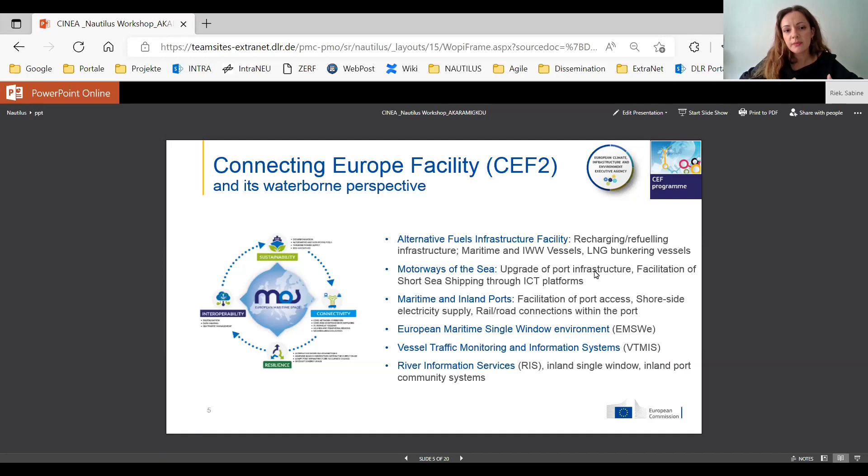With this in mind, CEF2 funded and will fund projects, among others, in the areas of alternative fuel infrastructure facility, vessel traffic monitoring and information systems, river information services, inland single window, and inland port community systems. Next slide, please.

The Innovation Fund is a key contributor for delivering the European Green Deal. It is a major tool to support industry and the energy and transport sectors in reaching the decarbonization objectives, with a budget of 25 billion euros to be spent until 2030.

The main target is to support the industry through the valley of death, pursuing ideas from their fundamental research to the early stage of demonstration. This is done through calls for large and small scale projects, focusing, for example, on the next generation of technologies, innovative low carbon technologies, energy storage, and more.

Several waterborne related applications were submitted in the course of 2020 for large and small scale demonstrators concerning first of its kind liquid CO2 transport vessels, tankers based on electrical engines and battery packages, e-methanol, hydrogen and fuel cell powered ships, and wind sails. An example of large-scale demonstration projects under the program funding is the project Hydrogen Europax, which is a zero-emission vessel powered by a large-scale fuel cell system, and will exclusively use green hydrogen from renewable resources.

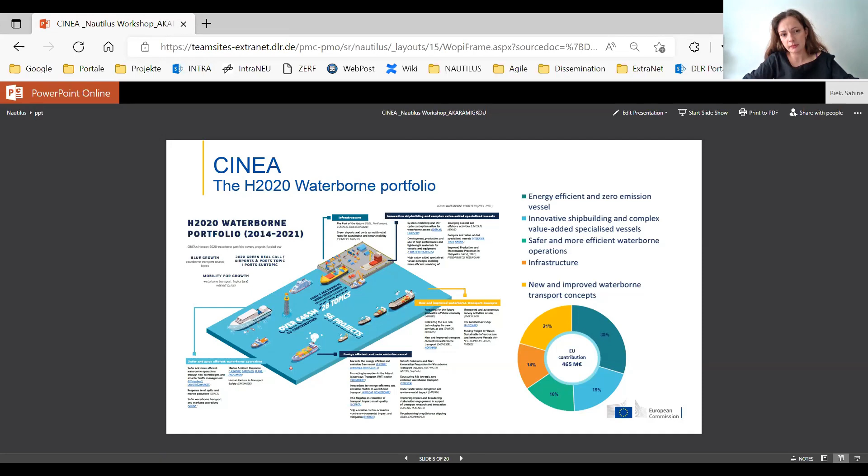So here, for zero-emission waterborne transport, the Horizon calls were asking the projects to develop innovative solutions to decarbonize shipping in general, to improve the competitiveness of European maritime industries and shipping companies in relation with green shipping, to create a widespread awareness and buy-in for stakeholders towards zero-emission shipping, to better understand the impact of the vessels through monitoring, detection, and modeling of emissions, and of course to provide technical evidence to assess the gaps in the current regulation of vessels and air quality.

Next slide, please. There are 18 projects addressing energy efficiency and the development of zero-emission vessels, with a budget that represents 30% of the overall budget allocated to waterborne calls, which is 465 million euros.

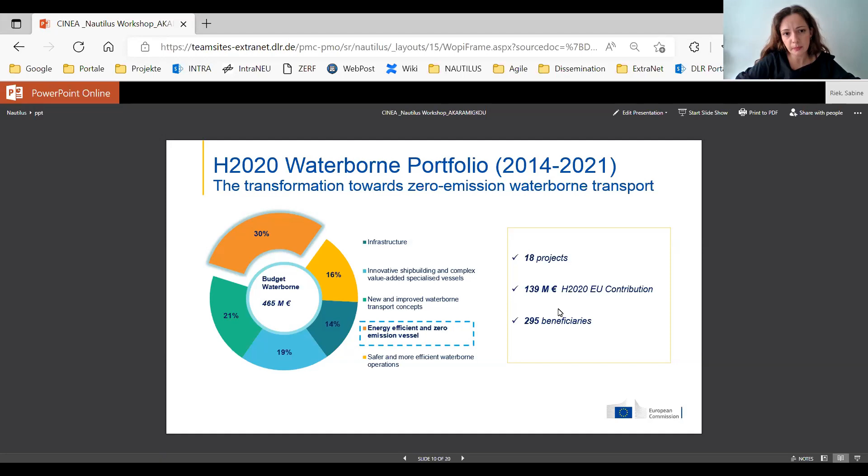Next slide, please. Now, with regards to safe and secure waterborne transport, the Horizon calls were asking the projects to radically redesign the evacuation process and systems for passenger ships, to enhance the prevention and management of fires at sea without recourse to external intervention.

To improve the observation and predictions of oil spreading in the sea using novel online sensors on board vessels, fixed structures or gliders, to build the enabling knowledge, technologies and operational procedures and test them in a real-world environment, and to improve transport safety through a more timely, focused and integrated adoption of human factors in order to minimize human error.

And finally, these solutions that address these risks should and could be reflected within the forthcoming revisions of relevant IMO rules. Next slide, please. There are 9 projects addressing safe and secure waterborne transport with a budget that represents 16% of the overall budget allocated to waterborne, with consortia of more than 200 beneficiaries.

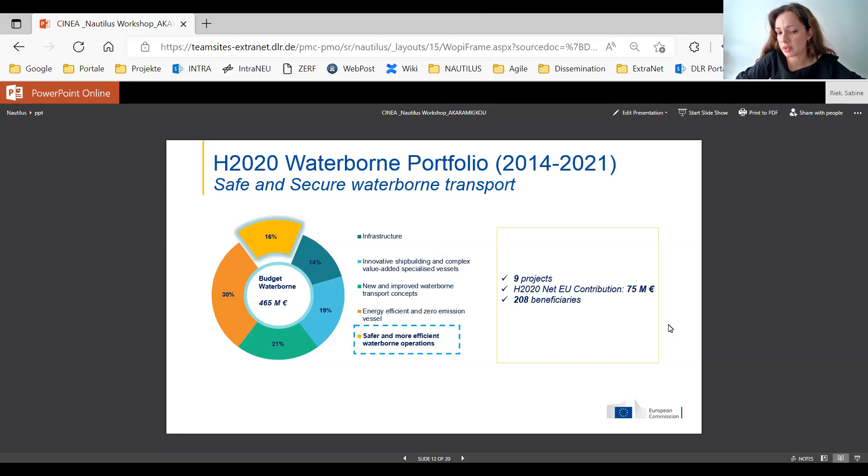Next slide, please. And I have divided the projects that are clustered within the competitive, connected, and automated waterborne transport under 3 more specific categories, which are infrastructures, new and improved waterborne transport concepts, and innovative shipbuilding and complex value-added specialized vessels. When it comes to infrastructure, the projects had to address challenges related to the improvement of logistics efficiency and integration of the port in the surrounding socioeconomic area.

The optimization of passenger and freight flows for low emission mobility, the acceleration of deployment of sustainable alternative fuels and electromobility, and the commitment and contribution to a Europe-wide take-up of technological, non-technological, and social innovative solutions. Next slide, please.

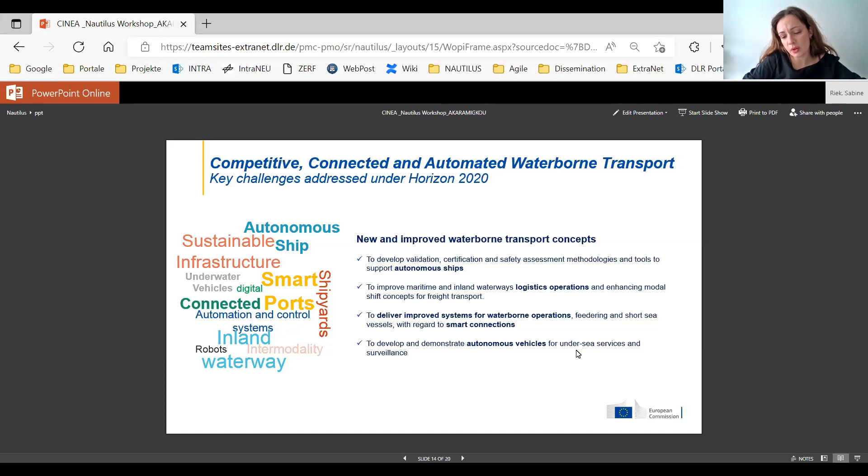For new and improved waterborne transport concepts, the project focused on developing validation, certification, and safety assessment methodologies and tools to support autonomous ships, improving maritime and inland waterways logistics operations, and enhancing modal shift for freight transport, delivering improved systems for waterborne operations, feedering and short sea vessels with regard to smart connection, and developing and demonstrating autonomous vehicles for undersea services and surveillance.

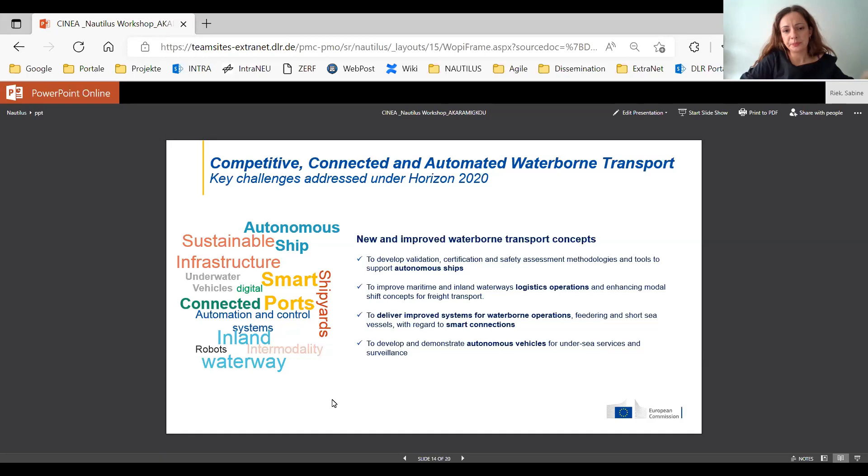And this cluster closes with innovative shipbuilding and complex value-added specialized vessels. Within this category, the projects aimed at providing a comprehensive performance analysis and simulation for new advanced materials and entire constructions of the vessels, developing and validating advanced modular standardized shipbuilding concepts for European waters, increasing the professional skills of workers and the capability of the European shipbuilding industry to develop and commercialize specialized vessels, and exploring and validating low impact cruise and passenger ship designs and operations.

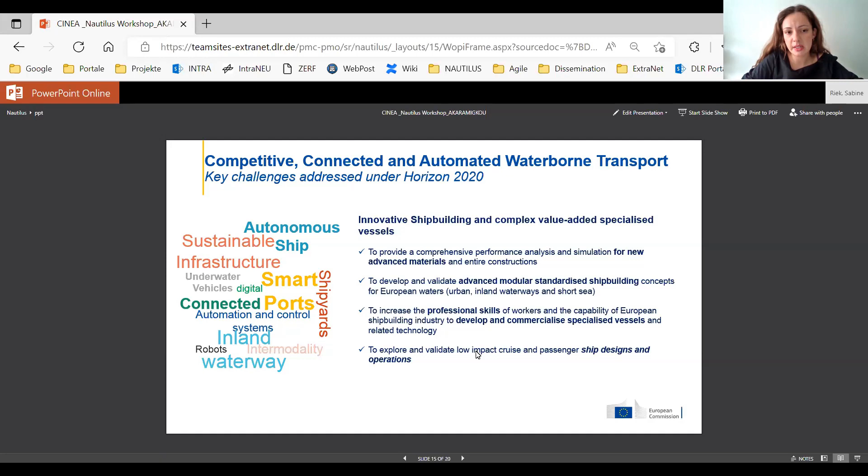So there are 29 projects funded to address competitive, connected and automated waterborne transport. 14% of the budget goes to infrastructure, 19% to innovative shipbuilding, and 21% to new and improved waterborne transport concepts. A budget of more than 250 million euros was allocated to these projects, with consortia of more than 400 beneficiaries.

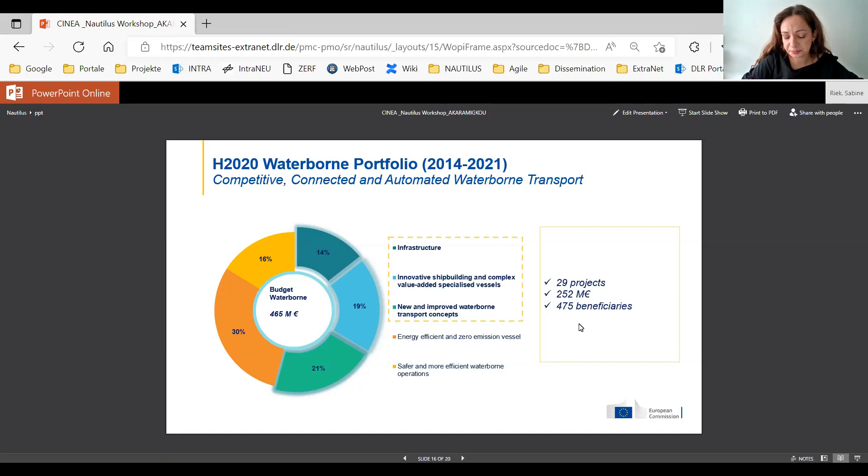Of course, the results of the Horizon 2020 program was and will be the bottom line for the research opportunities in Horizon Europe. Cluster 5 of the program, which CINEA is managing, aims to fight climate change by better understanding its causes, evolution, risks, impacts, opportunities, and by making the energy and transport sectors more sustainable.

As of today, we have already finalized the evaluation of 4 first calls for 16 Horizon Europe waterborne related projects. The European Commission services and the partnership are working hard at the moment to deliver the next work program 2023-2024, with the first deadline in April 2023.

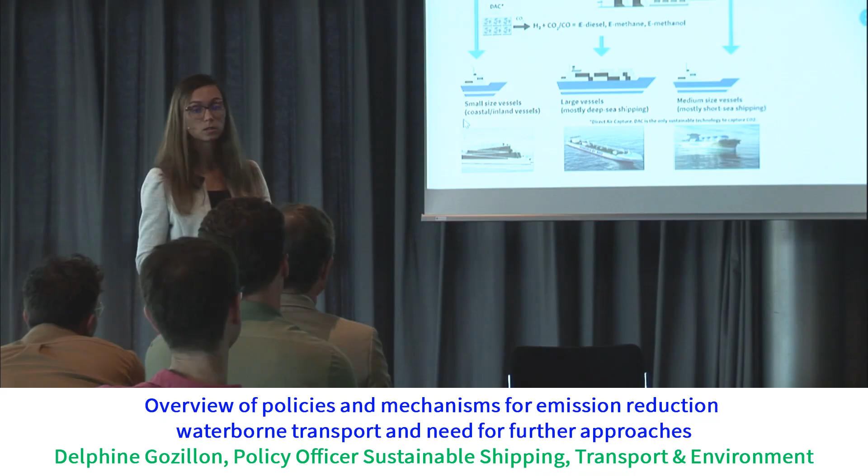In Lucerne, I'm happy to be with you and to exchange with members of the Nautilus project. Today I was asked to speak about the legislative framework that we have, and we'll be focusing a bit on the European Union, because the EU has a lot in the pipeline for the maritime sector. So I'll just start.

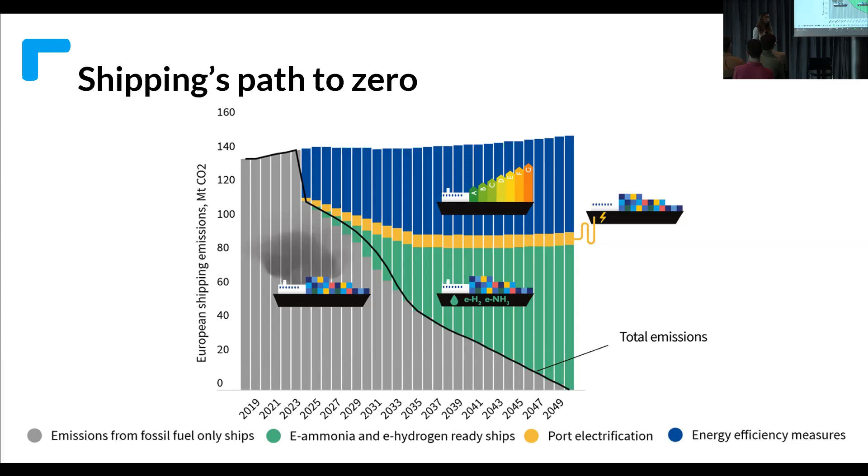I just wanted to begin with the scenario that we developed in our decarbonization study for shipping. We analyzed the different technological pathways to see how shipping can decarbonize fully by 2050. The main results show that energy efficiency has a big role to play; we could cut up to one third of emissions.

So I was saying that energy efficiency is important, it can cut up to one third of emissions. Electrification in ports is also important, it's more on the order of 6% of emissions that we could cut.

But really the bulk of emission reductions comes from changing the fuel, of course. Here we recommend fully sustainable fuels that can achieve zero emissions, and these are what we call green e-fuels.

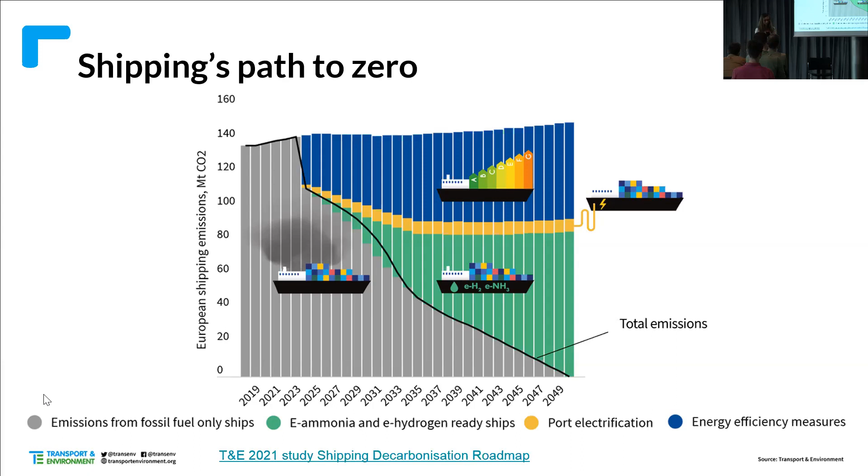We have different solutions, different sustainable fuels, depending on the shipping segment, because maritime transport is quite specific in that regard - it's not like aviation where you can blend e-kerosene in any plane. For ships, it really depends on the ship size, but also the segment.

So here are some examples of sustainable fuels. There could be direct electricity for smaller ships, especially on lakes, for example in Lake Lucerne. Or for larger vessels, the direct use of hydrogen, either in combustion engines or in fuel cells, is possible.

But for longer distances, and this is more for big container ships, we would see derivatives of green hydrogen - for example green ammonia, green methanol, but also synthetic diesel or synthetic methane are possibilities.

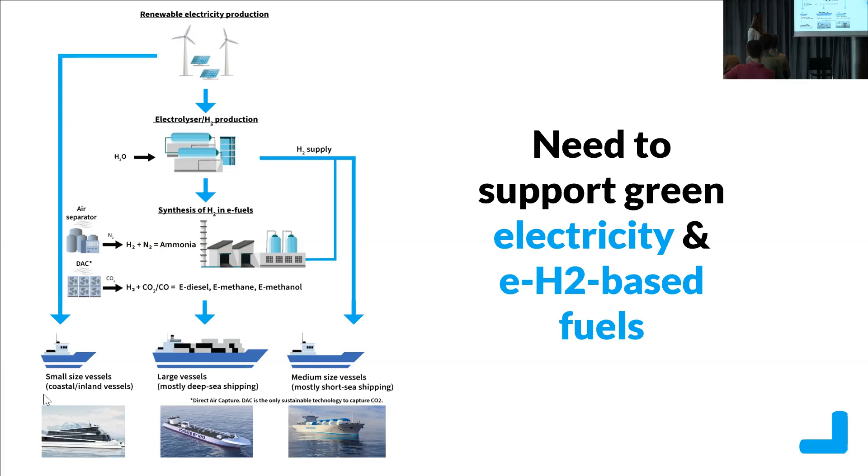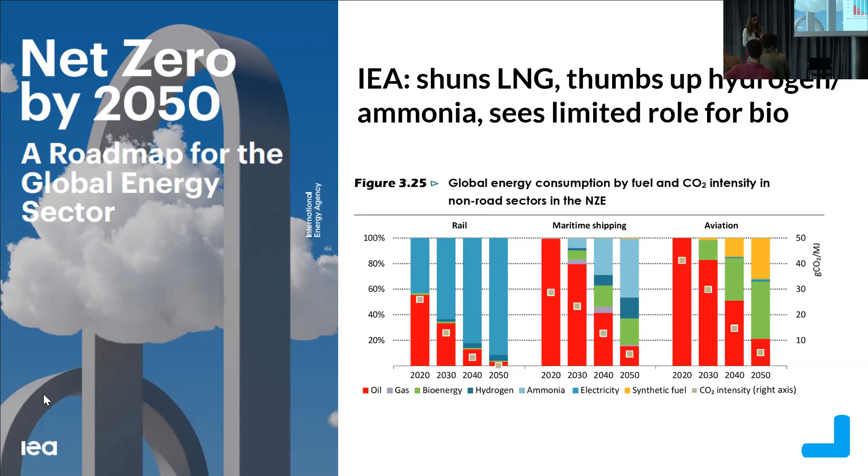There are a lot of concerns today on the use of LNG as a marine fuel. Notably, the World Bank issued a report last year warning policymakers against the use of this fuel because of the risks of stranded assets. This is something investors have in mind when investing in projects.

There are also other alternatives that are zero emission and which are funded by the European Union, as presented by the previous speaker.

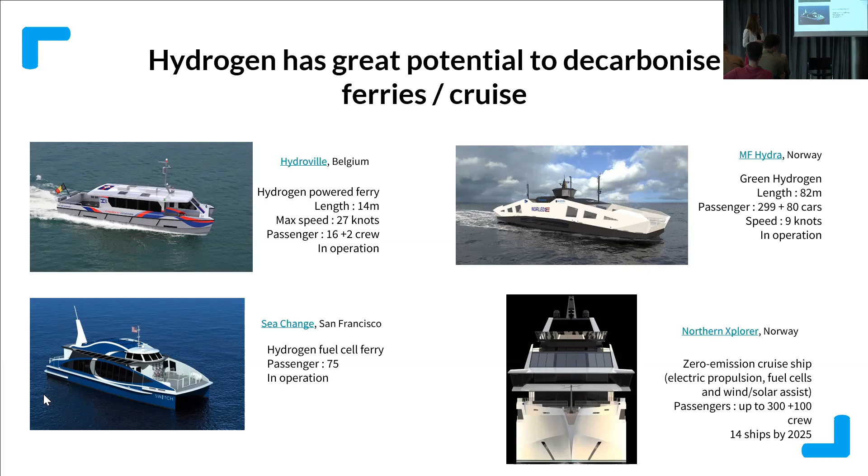I think one very interesting example here is the Northern Xplorer in Norway. Of course this is a much smaller ship than a typical cruise ship, but it could run on hybrid electric propulsion and hydrogen fuel cells. This is already being ordered - we would have 14 ships by 2025.

Now comes the regulation. The European Green Deal translated into a legislative agenda, a package of proposals put on the table by the European Commission last year. Now we are in the process where the European Parliament and the Council of the European Union are negotiating the details, especially the level of ambition being discussed.

It might sound like a lot for maritime transport to achieve in the coming years, but from the point of view of environmental organizations, the package is actually not enough. This is what I'd like to talk about today.

Here's an overview of the different shipping proposals. One is about the demand side, how to ensure uptake of new fuels - this is FuelEU Maritime. One is about the carbon price, putting a polluter pays principle in this sector. The other is the Renewable Energy Directive, about fuel suppliers and bunkering infrastructure, since we need compatible refueling points in ports. So this is a whole framework.

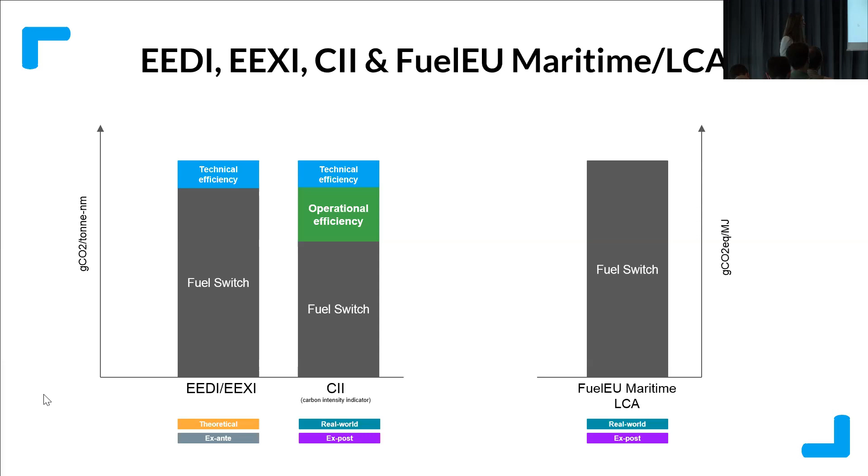This is the full design of the FuelEU Maritime proposal. We did a study on this legislative proposal, taking the life cycle GHG analysis provided by the European Commission, and we compared the GHG footprint of every maritime fuel. This is all based on data provided by the Commission. We didn't invent anything.

What is interesting to see is how the different fuels will progressively cease to comply with the regulation, because the FuelEU Maritime regulation will put a GHG intensity target on every unit of megajoule that is used. So of course it starts very mildly in the first years, but then it becomes more stringent. It's particularly relevant, I think, for the case of LNG.

Because the GHG footprint of LNG very much depends on the type of engine that is used. The difference you can see between the types of engines is typically the methane slip. The four-stroke engines usually used on cruise ships are the worst ones, and the GHG footprint is usually higher than current diesel ships.

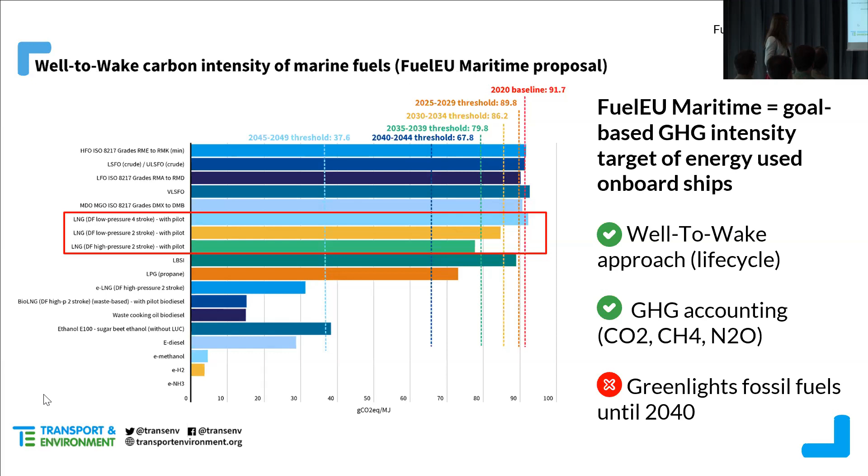What we have criticized in this proposal is that the targets in the first 15 years are so low that it greenlights fossil fuels until 2040. So you can use purely fossil fuels until that date and still comply. In our analysis, based on the cost of the fuels, we forecasted that LNG demand could be driven from 6% today to 23% already in 2030. This is quite significant, and this is why we recommend other approaches to ensure the uptake of sustainable fuels arrives much quicker.

One tool that is quite important is to raise the targets. Currently, the targets proposed by the European Commission do not go to zero emission by 2050. So of course, if we want to respect the Paris Agreement, we need to put these targets in the right context.

This is the main proposal from Transport and Environment: to ensure sufficient uptake of green hydrogen-based fuels. Here we're talking about green hydrogen, green ammonia, green methanol, but it could also be synthetic diesel or synthetic methane. We need to have a mandate on ships to use a minimum percentage already by 2030. This is key to encourage demand and make sure we meet our decarbonization targets by 2050. We recommend 6% by 2030, and this is being discussed in the European Parliament right now, and might be voted in October.

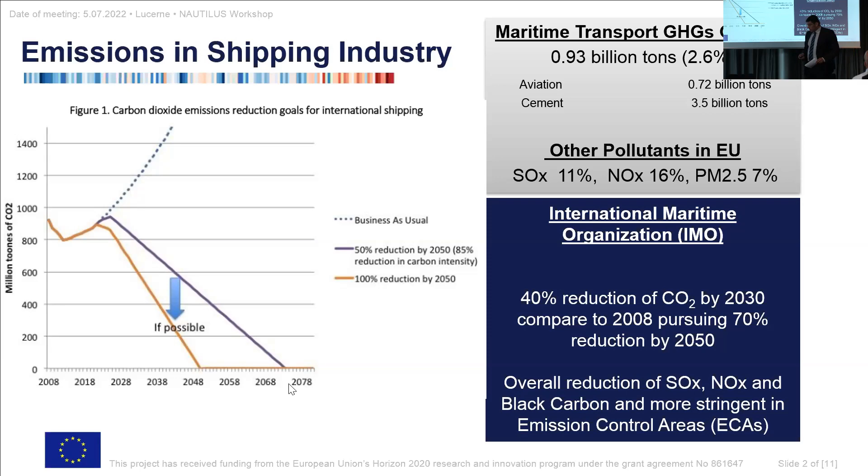Other pollutants are relevant, and we had a long debate about it before we started talking about global warming and CO2 reduction, because CO2 does not harm health directly, while other pollutants do. There is a quite long effect - this is a result from France that has come out, whether it's lungs, blood, vascular system, brain, heart, or reproduction. All of them - SOx, NOx, the PM particles - have direct health adverse effects, and we are still learning more about them.

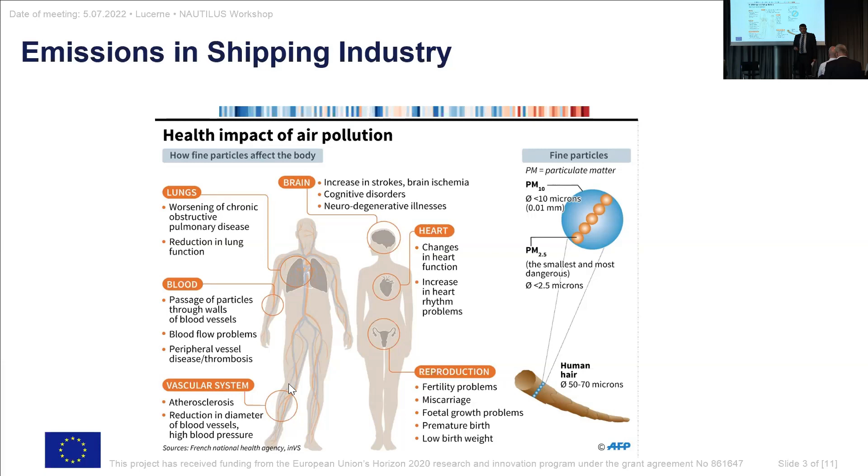The knowledge is not enough. Coming back, prior to putting a regulation about CO2, there were much harder regulations that the shipping industry and all of us had to take care of, the reduction of these other pollutants.

Third aspect, which is more specific for the cruise industry. The cruise industry is considered a leisure industry. It has been one of the largest growth economic factors before COVID in Europe and worldwide. We all love to go on cruise. I would love to stay in one of those places.

The challenge is the people who are on top of the deck love it. The people who are not on top of the decks disgust that. And that perception is because if we are not enjoying them, then we are seeing them as a hazard, right?

But the reality is, the majority of us would love to be on one of the ships of Meyer-Werft or of Chantier Atlantique to enjoy this thing, only if we know that this is a clean ship, and that is what we are trying to go for right now.

Now before we go into different aspects, I would like to set up, and I want to thank Meyer-Werft for providing some of these reference points.

So we start from the reference point, back in 2008, not today. Go into the past. There was not LNG yet. The fuel of choice at that time was heavy fuel oil. The engine was a diesel engine and diesel generator. And there was probably no exhaust treatment happening.

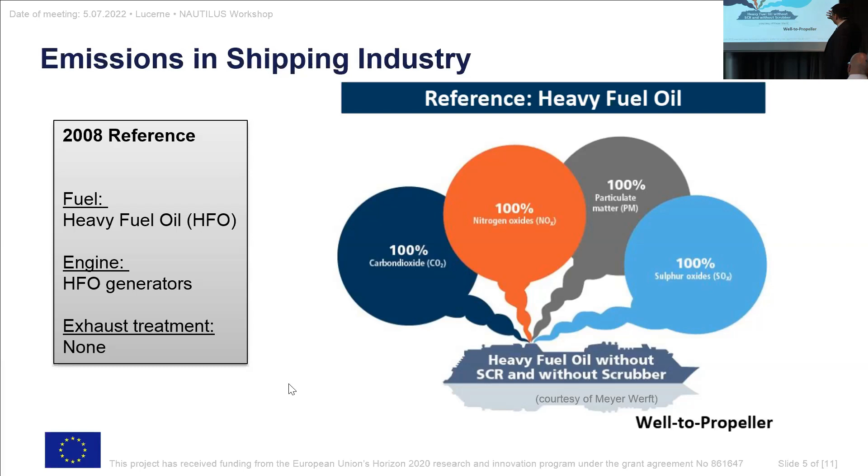At that time, we would say that the emissions coming up were 100% CO2, and then NOx was 100%. As a reference point, we take it 100% PM and sulfur oxide.

What happens is that now, if you look into it, there's already a first phase of transition ongoing. In this talk, I will tell you that this transition in the maritime sector can be divided into three major phases, three major paradigm shifts. The first shift was already in place before we even conceived the project Nautilus.

This was already happening, that the shipping industry was working on getting away from heavy fuel oil to something cleaner. And cleaner not just for CO2, but cleaner for the other pollutants too, trying to go away from the heavy fuel diesel generators to more gas engines or gas motors that were used to generate electricity.

Then at the intermediate phase, there was of course exhaust treatment put in place more and more to reduce the pollutants. It has almost no effect on the CO2, but on the other pollutants it does. But then going towards LNG or gas allowed them to get rid of some of these post-treatments.

They are implementing now to go to the Euro 6 conditions as well. And if we assume that going from heavy fuel oil to LNG, the shipping industry themselves were quite neat in that. They expected to have a reduction of CO2, but because of the methane slip, they said we will not probably have much gain if we talk only about the CO2.

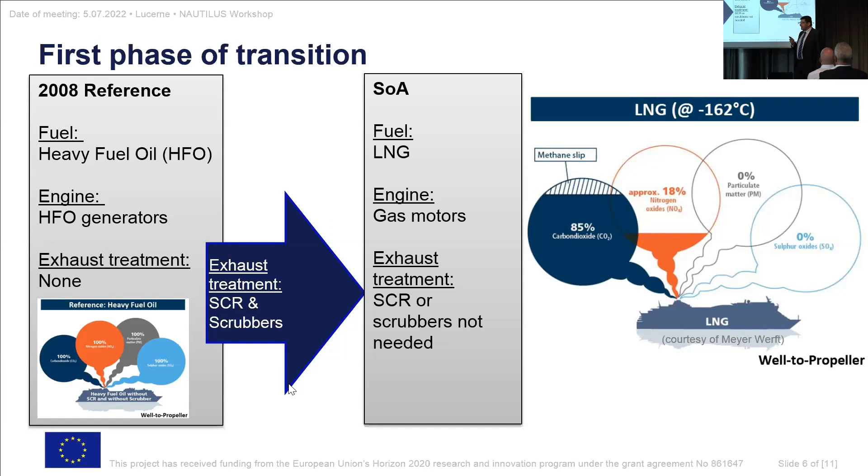But they already saw that the NOx, the PM, and the sulfur oxide, if not exactly 0%, was a very low amount, right? So they already gained in other pollutants. Now this is already the first phase that we were looking at, and this first phase was not something thought through - it was bought by the market.

So again, this is data from the Meyer Group, and we see that back in June 2015, all the purchase orders were for heavy fuel oil. Then just before COVID, in June 2019, almost 88% of future orders were LNG. I was just talking to Laurent from Chantier Atlantique, and he said that now all the future orders at their shipyard are only based on LNG.

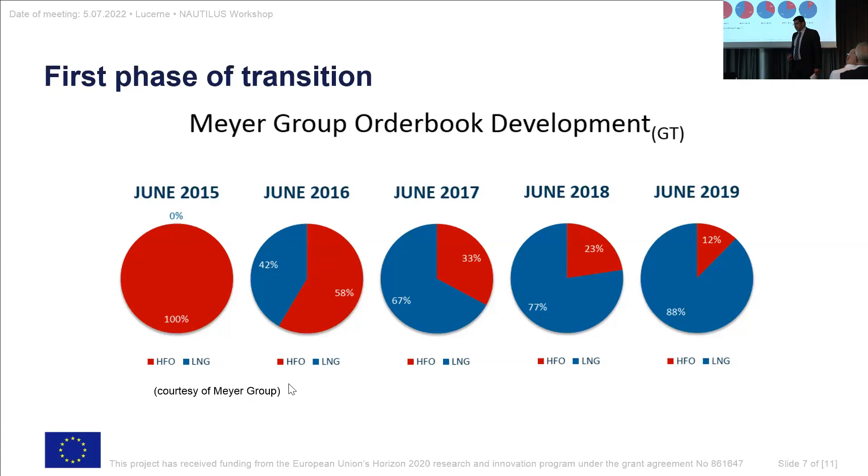Coming back to the question of what we are going to do next, how we are going to attain the next phase of reduction of emissions, both pollutants and greenhouse gases - that's where project Nautilus was conceived. The idea is to replace gas engines with another onboard generator that provides at least 10% higher efficiency, but more importantly, enables us to avoid methane slip. This is a key point - efficiency can take you far, but methane slip is critical to address, while also reducing other pollutants by 99%.

When we have these kinds of targets in place, we see the need for a new energy system, which brings us to a fuel cell. More specifically, with our partner SOLIDpower, we conceived a technology using a solid oxide fuel cell hybridized with a battery. This enables us to increase efficiency by 10%, reduce methane slip to zero, and reduce other pollutants like SOx, NOx, and PM by 99%.

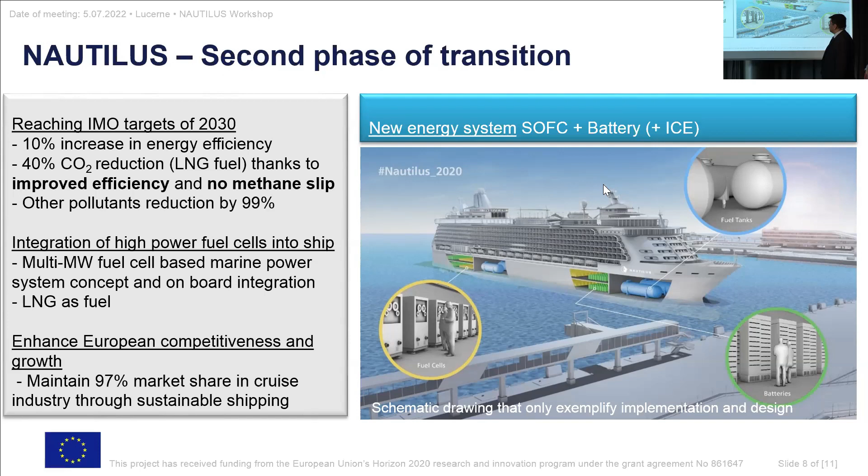Such a system will be conceived as a modular design, typically with 10 systems making up almost a 1 megawatt unit. Multiples of these 1 megawatt units will be put together in two or more engines to reach capacities between 5 and 60 megawatts, covering all the needs of hotels, equipment, and propulsion, whether in steady state, maneuvering, or anchoring conditions.

The idea of hybridizing in the beginning was mostly for the possibility of peak shaving, but we've now advanced enough that the batteries don't provide an advantage in terms of peak shaving - instead, they provide an advantage in transient shaving.

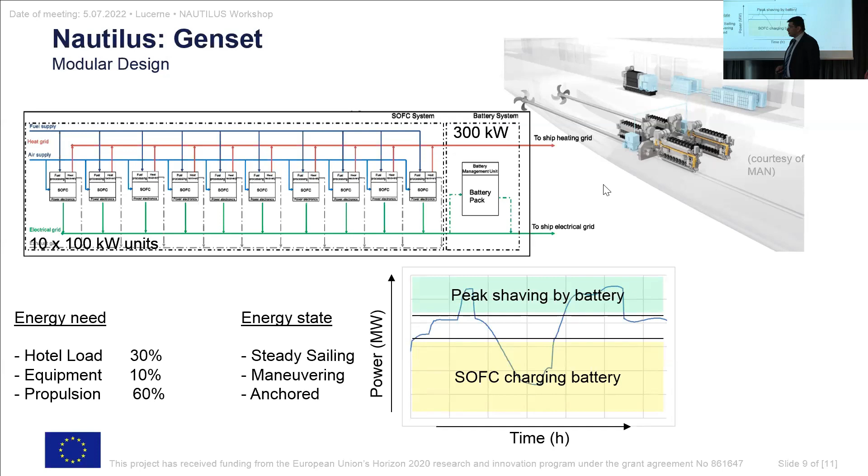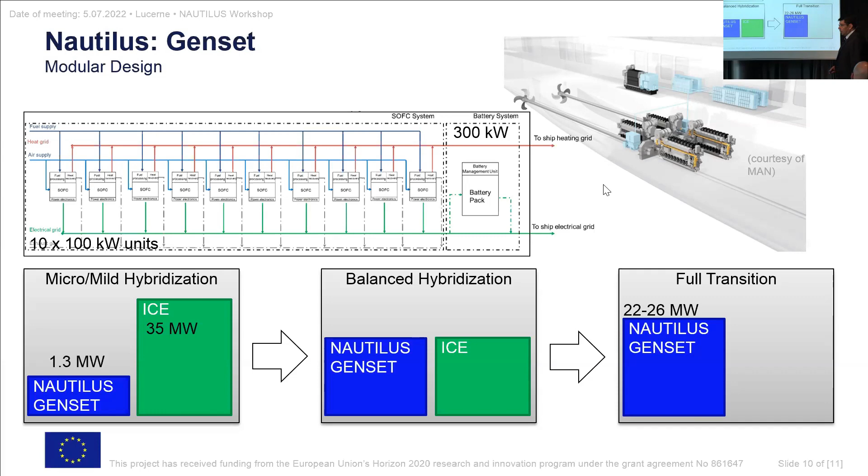A key aspect is that in order to make this technology viable, we're going in a stepwise fashion: first hybridized with the ICE using micro or mild hybridization, then moving toward a balanced hybridization where half is still ICE and half is fuel cell, to mitigate financial and technology risks. Finally, there will be a full transition from ICE engines to fuel cells, by which time we will attain our overall objectives of reducing carbon dioxide and pollutants.

The challenge is as follows: on one side, we already have quite high electrical efficiency, and thermal efficiency comes on top of it. This is one of the different schemes of the fuel cell, showing the fuel cell system of Nautilus. We have been working in the project to push this technology toward higher efficiency, and I'll show you the results afterward.

A more challenging aspect is that since the technology was developed for land-based applications, one issue is specific power density, or watts per liter, which is currently quite low. For shipping, this is a major factor in the design and layout within the ship, and we're trying to improve it further. The good news is that for the automotive sector, based on this technology, much higher volumetric density was attained, and our target is to re-achieve that value for our application - and this is doable. So throughout this process, we are suggesting processes and technology that are doable and implementable today.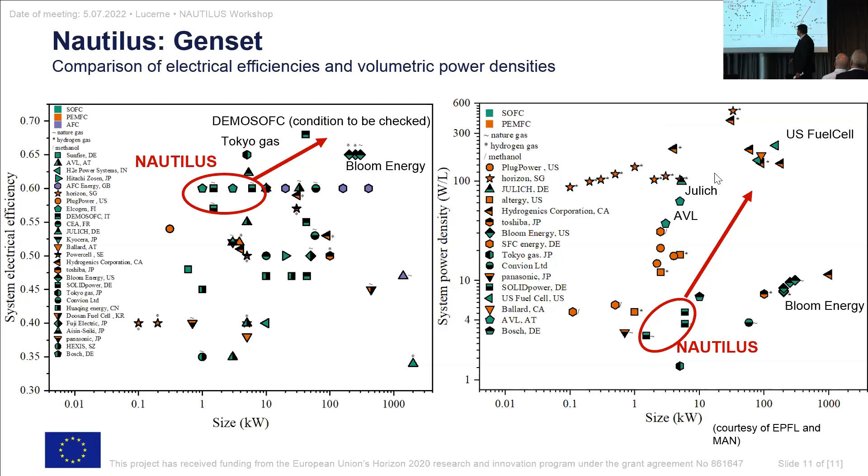Okay, some quick results. We did a very extensive design at 5 to 60 megawatts using typical engineering practices. An advanced P&ID was developed with an optimized heat exchange network as well as anode recirculation.

Without going into all the detail, the outcome is that we're attaining an electrical efficiency of more than 64%. If we combine heat and electrical efficiency, we reach 87%. It should be noted this is good heat - well above 300 degrees centigrade at the exhaust, close to 500 degrees centigrade, which allows us to effectively utilize this heat for onboard applications.

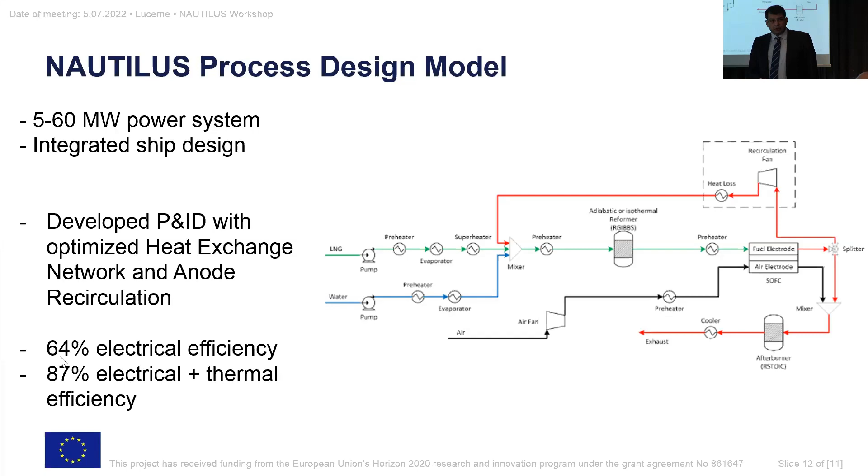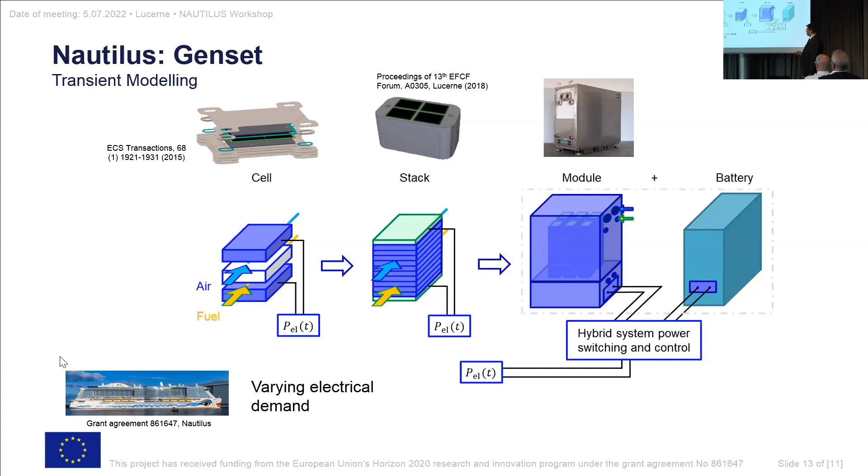We did very extensive modeling, mostly transient modeling of the fuel cell only, but also fuel cell and battery together, from the cell to the stack module level, but also the hybrid system. The purpose was twofold: to see how the behavior of the fuel cell, depending on demand, will change. For example, if the load is changing, how does the voltage as well as temperature change?

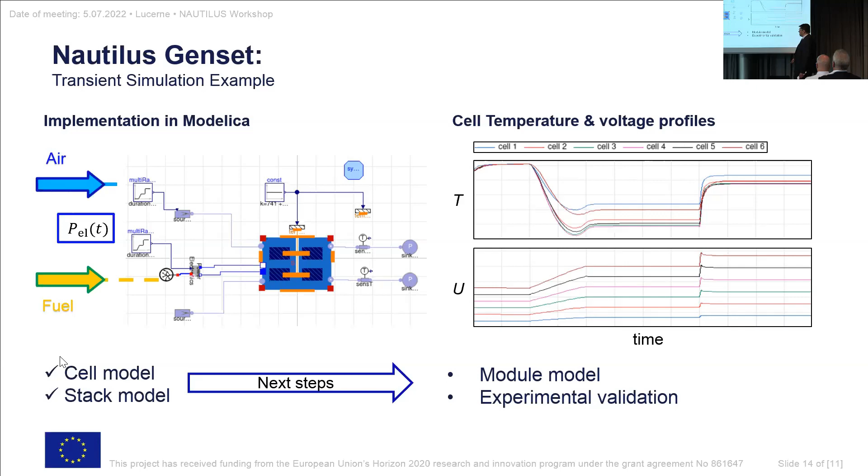What does this mean for an engineer, for example? Some of the work you'll see if you're staying for the conference, there will be talks from German Aerospace Center and also colleagues from Aachen, showing how much airflow rates and other parameters have to be changed in order to maintain performance and get the output we require under these conditions. We also see some control strategies on how the balancing between the batteries and the fuel cells should work under different conditions to handle those transients.

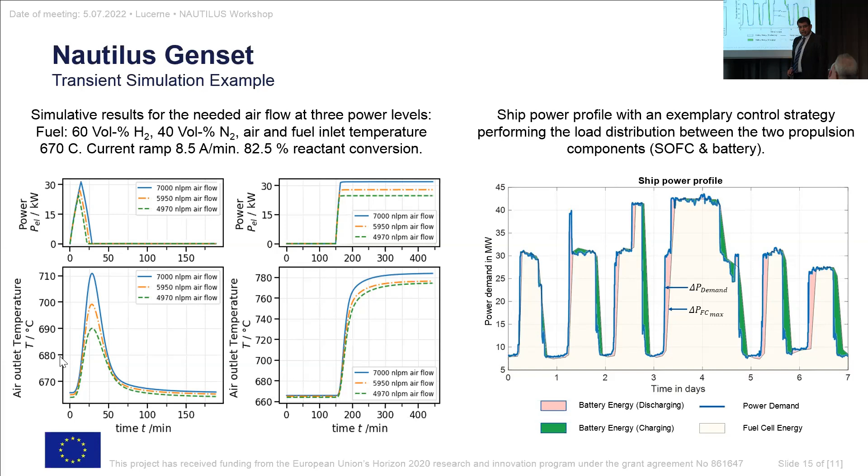Now, we are not just doing modeling work at DLR, but also at Solid Power. We have developed two test rigs which allow us to test these fuel cells, the large stack modules at 30 kilowatt capacity, but also hybridize it with a battery system and run experiments.

I will not go into these older data, but there are newer data that will be presented in the coming publication. We see that already at an efficiency, even not reaching the full temperature, we reach with methane an efficiency of about 75%, so electrical efficiency of 52.5% at low temperature. The target is that with the new data, you will see the electrical efficiency we saw on the concept of 64% will be achievable in our proof of concept at the demonstrator as well. That will be shown in the next data.

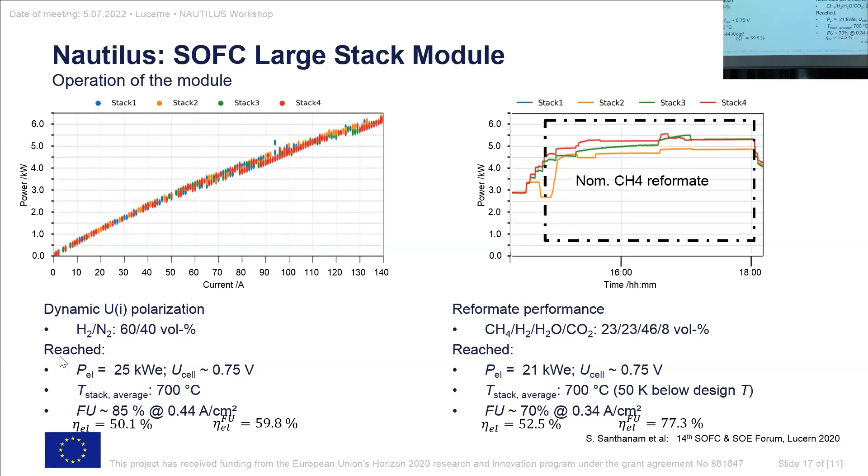This is a key point. Analysis done by our colleagues at TU Delft also mentions this: the same system can be operated with different fuels, including ammonia, but the electrical efficiency is highest using methane. Now, the source of this methane determines where the CO2 will come from or go to.

Thank you very much for sending me this data. We took those fuel cells that we want to put on board, but also put them on this inclination platform and turned and twisted them to test what will happen to such fuel cells if we put them on board a ship. The data is still in raw form, but it's completed. I'm told the TU Delft colleagues will be showing this data soon. Thank you very much to all the people from Solid Power who did this testing together with the TU Delft colleagues—that was an amazing exercise.

So we train astronauts almost in the similar way. Yeah.

I come to the last slide before my time runs up. We talked about the second phase of transition, where some of you will say I've been talking about LNG. Yes. So am I advocating LNG as a fuel for the future? The answer is we want today an energy system that can operate with the existing system of ICE, and hybridize it with the same kind of fuel without de-functioning the existing assets and existing infrastructure.

LNG can be blended and displaced. So instead of using fossil LNG, even tomorrow we can start mixing with biomethane, or mixing it with e-methane. That means the leakages, the methane slip, will go away with our technology, and also the CO2 emissions we're worried about coming from the methane—since this methane will be synthetic, we avoid that challenge. Since the infrastructure is already available at ports today, and technology is already moving towards LNG, we can utilize and maximize leverage on existing investments and assets.

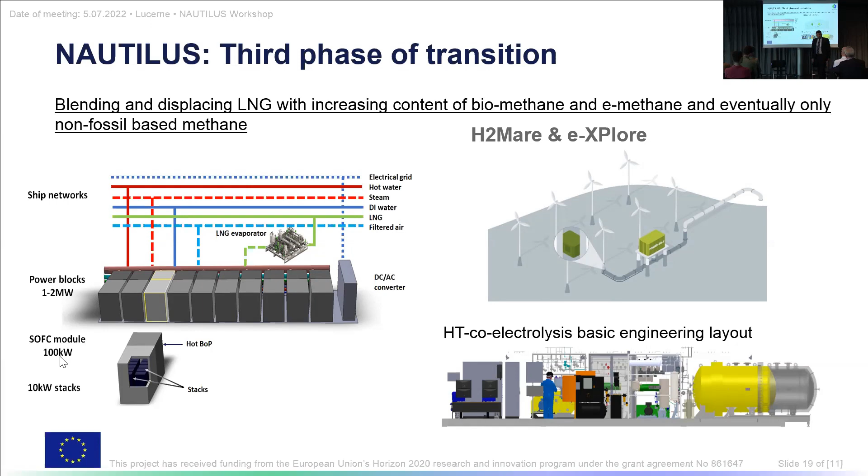I would want to leave it that we are not just working on the fuel side, the fuel to power, but also a project on H2 Mare, where these two technologies, renewable power together with high temperature co-electrolysis, enable us to produce e-methane directly by capturing CO2, using green hydrogen from water, and making it into carbon monoxide and hydrogen, and directly into CH4. That is a vision we want to implement in Nautilus as well.

With that, I would like to conclude. Again, I want to come to 3 phases, which is the vision, the key vision of why we want to support and go forward with Nautilus. Already, the first transition is ongoing, which is heavy fuel oil giving way to LNG.

That also means diesel generators are giving way to gas engines. This already introduces 10 to 15% lower CO2 and 70 to 80% lower pollutants. These were the first reasons why the shipping industry moved towards LNG in the first place.

We would like to leverage on that. We want to increase the energy efficiency by 10%, but also introduce a technology that will not allow methane slip. That is a key point to take. This high efficiency and no methane slip will allow us to reach a reduction of about 40 to 50% of net CO2, but more importantly, almost 99% reduction of pollutants.

By gradually changing, we can still utilize the existing onboard and offboard infrastructure, whether that's the power system or the supply of fuel, and then move into the third phase where LNG will be displaced with e-methane and biomethane, and let us achieve net zero waterborne transport. Thank you very much.

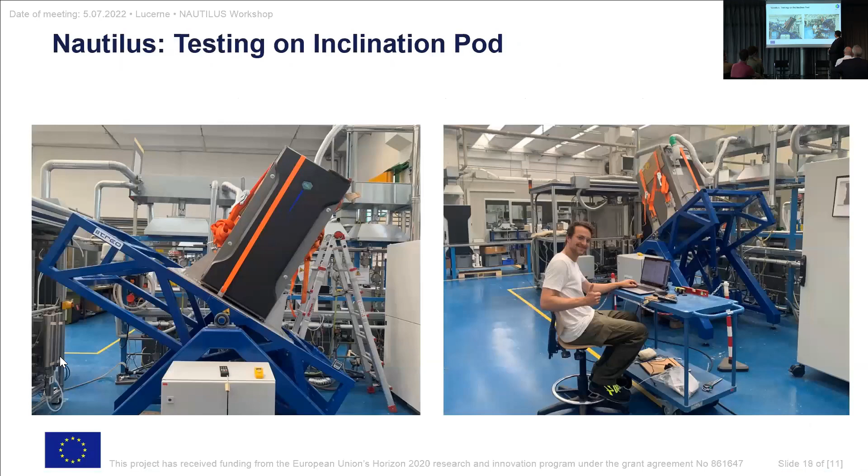Yeah, okay, it's storage temperature. Okay, that clarified it for me. Right, actually I was wondering if there was something in the process. Okay, okay, then there is.

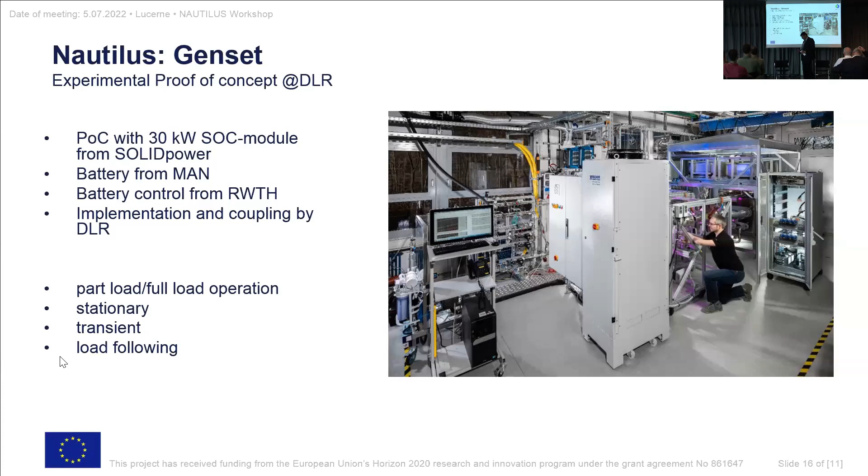So you say on your last graph that the engine allows a 40 to 50% CO2 reduction. My question would be, how does this translate in GHG emissions? Because obviously you have no methane slip, but there are also methane emissions happening along the value chain before use, and is this calculated as tailpipe or life cycle?

Thank you. Yes, I think we need to come to an agreement that the majority of the methane slip we talk about happens at the engine level. There is leakage throughout the value chain, but the amount of methane slip happening at the engine level is far superior, though please let the shipping industry correct me on that. Our target is that if the majority of that methane slip, which happens during onboard energy generation, could be avoided, then this value is reasonable to attain. Also, this value is normally calculated only for onboard generation, so we're not talking well-to-wheel, we are talking about tank-to-power or tank-to-propeller system. This reduction is primarily calculated at that stage.

There's one question from Kinolitis, formerly at TKMS, now at Zeppelin Power Systems. He's asking, how do you see the future of synthetic natural gas in view of taxonomy?

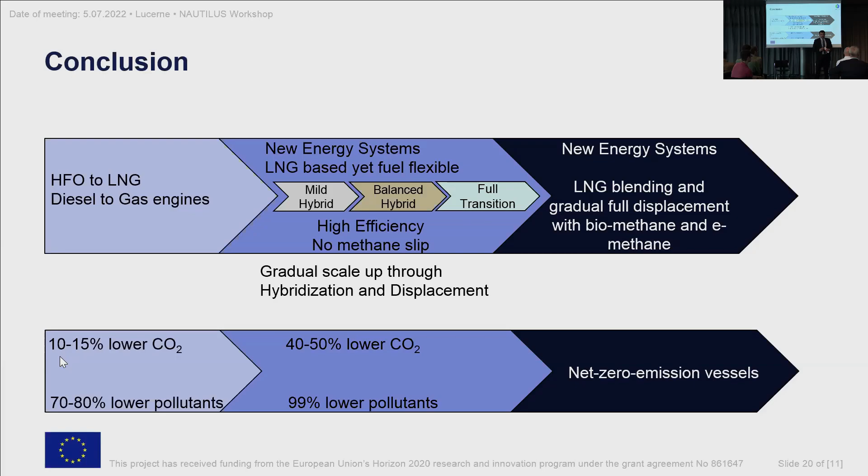My presentation is not so much scientific, so I'm more going into the design of cruise ships and talking a bit about what has really happened. I'll give you a short history of our company, which is a long company, 225 years, and I'll come back to this.

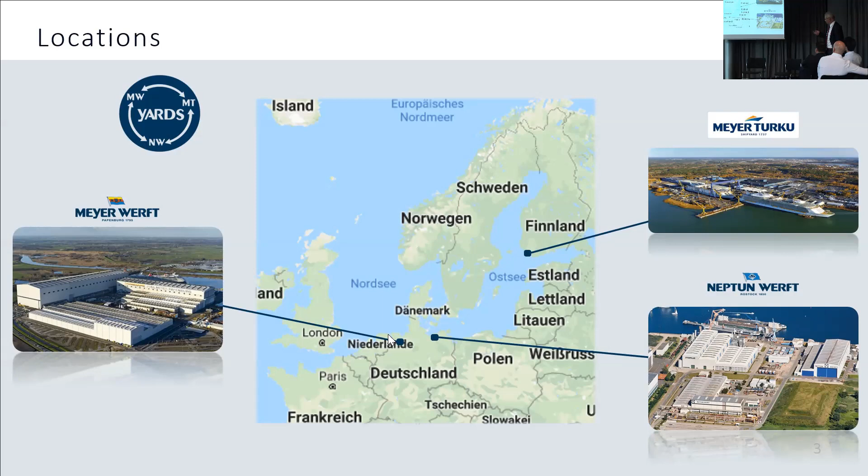We have three different areas where we have our shipyards: Germany, Finland, and another one in Eastern Germany, with a total of about 7,000 employees, focusing on this product portfolio - cruise vessels, river cruise vessels, ferries, passenger ships, research vessels, island ferries. It's quite long.

Our industry is in very hard competition with Asian shipyards. This is also one motivation to really invest in new technologies, to be ahead in all these technologies. This is quite important for us to stay alive in this market. It's important for everyone here to know that we are under strong competition, and this is something the maritime industry worldwide is working on. We are developing a lot of these things, and for us it's really important to keep this knowledge in Europe. This is quite important for us to stay alive with our industry.

Coming back a little, this is maybe the last picture Laurent showed. We were already carbon free in our past - we built wooden sailing ships. But what is the difference with what we are doing today? This is a modern LNG-driven vessel. At least with wooden ships, you didn't know when you were arriving, or if you were arriving at all, alive or not. Also the size, volume, everything is quite different.

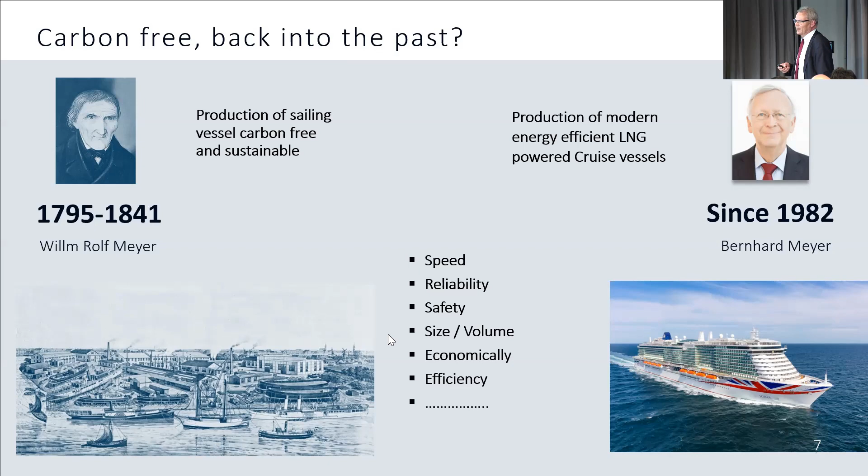So there is a development in this direction, and I think we cannot turn back. Laurent has shown this picture, but it will not be valid for the complete vessel to return to sailing. So what we have to do - okay, we have come from the dark side of the world into the clean side of the world, so we have to do something. This is really what we are looking into.

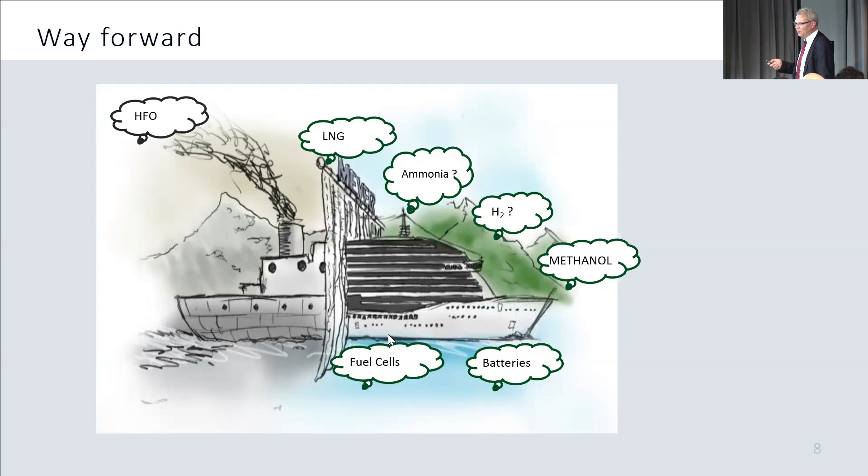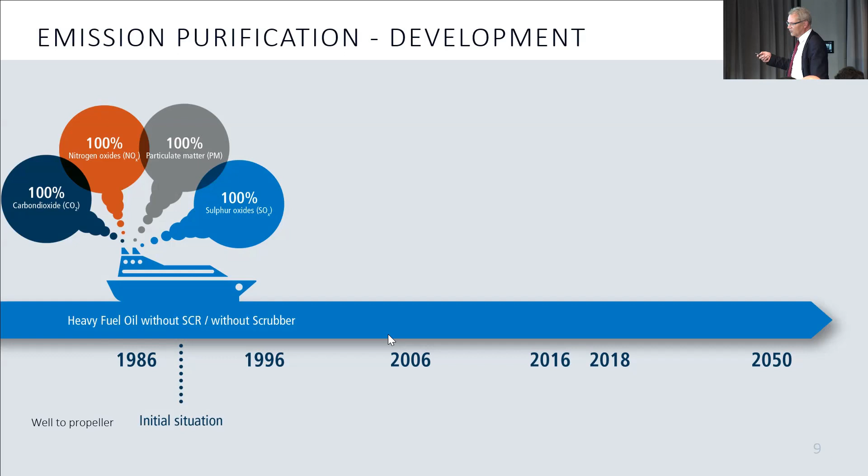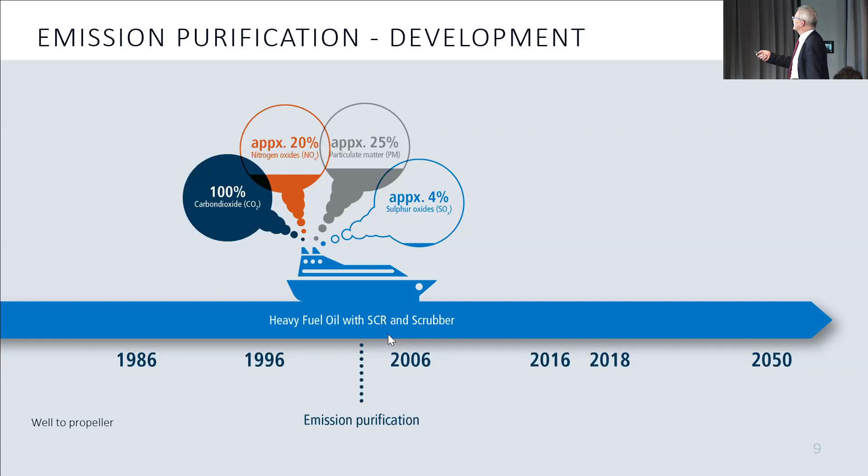You've already used some of this, so I can pass through it quickly. We started in '86 with heavy fuel oil, which was the bad thing we could do. But all this coming now was focused on the rules and regulations for emissions from the IMO, based on sulfur, NOx, SOx, and all these particles. Then we entered into LNG, which you also explained already, which was a step forward in preventing emissions - sorry, I'm blocking your view - in regard to sulfur and particle emissions, but this is not the final solution.

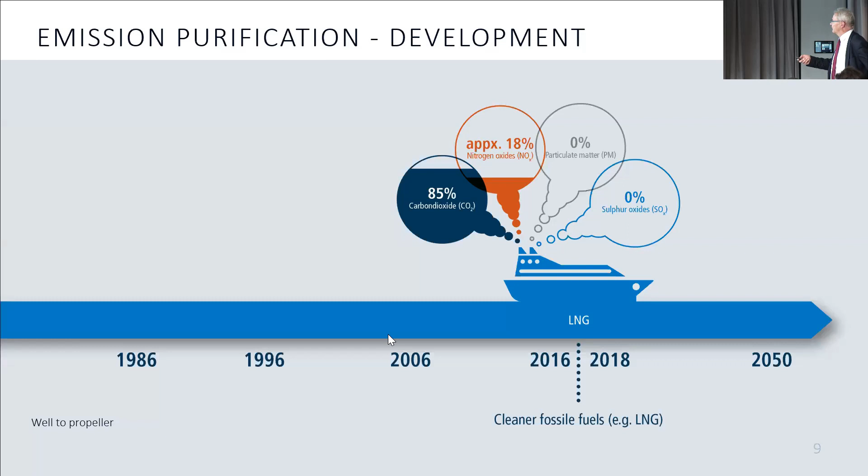We still have fossil fuel. So the next step is to enter into renewable fuels, but then we still have something, but I think we can cope with this through technical solutions with after-treatment. And maybe the vision is to come really to a zero emission ship, and a fuel cell could be one way to this, but this is the way we have now to describe.

But we have done a lot already, this Laurent mentioned also. We are not focused only on the fuels, we are focused on energy efficiency. Similar to what Laurent has shown, we started in 2001, and we reduced more or less by 50% the energy consumption of the ship. And this has nothing to do with producing energy - if you don't have to produce it, this is a saving in itself. So this is the best way, the first way you can do.

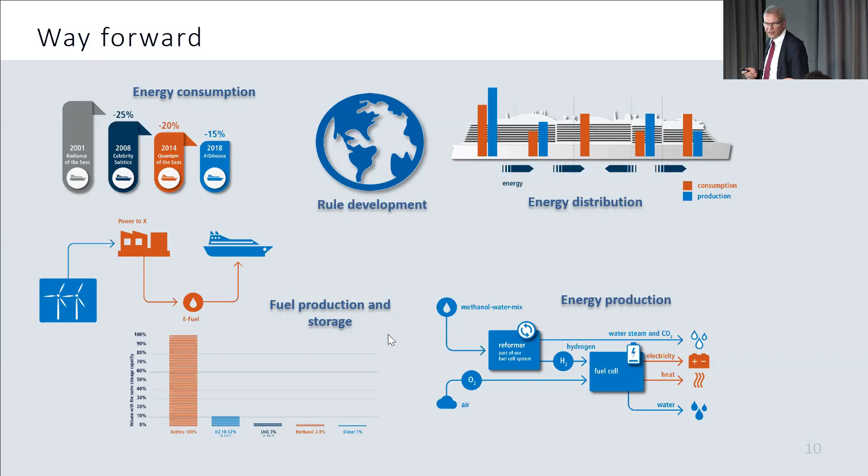On the other hand, we are looking at all these different technologies. We are looking also in the future for the energy distribution to improve this energy production, and we are looking really deeply into new fuels or alternatives to fuels.

So this is what you are facing now in the newspapers - every day you see a new article from wherever, from whomever, saying okay, this is a silver bullet and let's go this way. At the moment, we don't really see that there is a silver bullet.

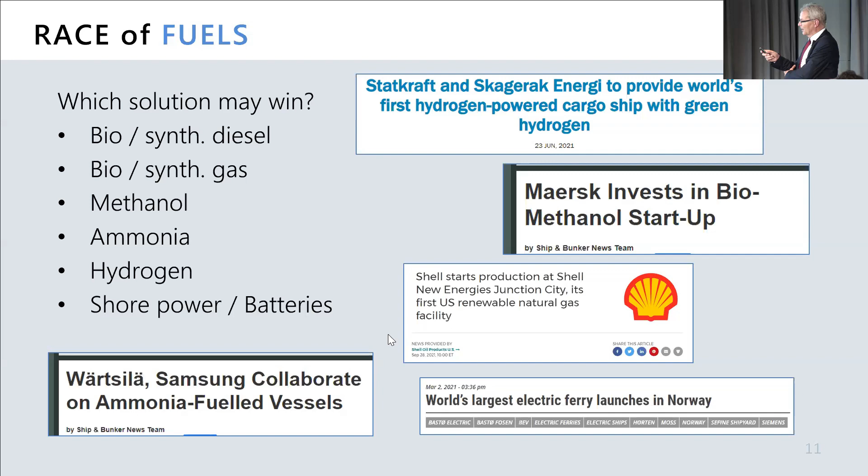There are a lot of alternatives, and I think we have to really look deeper inside all of these alternatives. So we have synthetic diesel, we have gas and synthetic gas, we have methanol, ammonia, hydrogen, we have shore power, we have batteries. At the moment, we have to look at what is really behind this.

I think for different applications, you can use different fuels. If you have a ferry going from one side of a lake to the other side, then it's easy to use electrical energy, then there are no losses, more or less. Then I will come to the price we have to pay for the alternative energy.

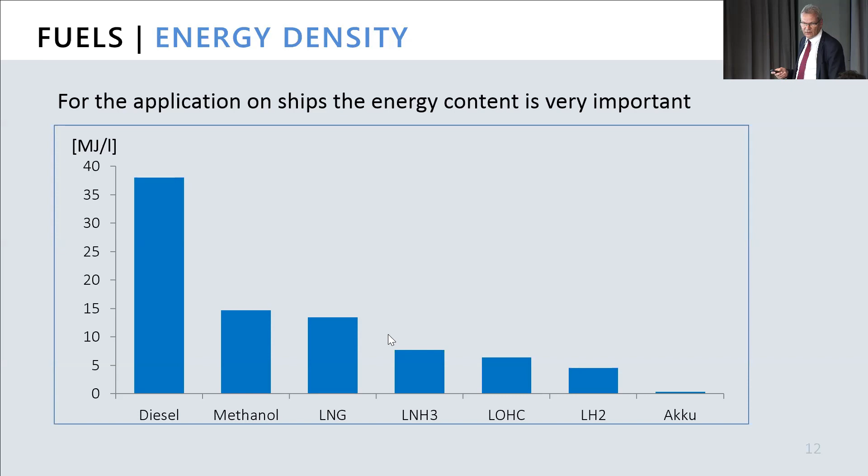Then you can already see what maybe Laurent has already explained. With the change from diesel to LNG, we already lost a lot of available space on the ship. So it was already a big investment for the owner. He was losing really payable space based on this technology. This was one step forward in its time. I think the figures speak for themselves.

We listed all these fuels to give only an overview on this. We have to look for the availability of the fuels. For some fuels, we have already a distribution system. For some fuels, we have no distribution system at this time.

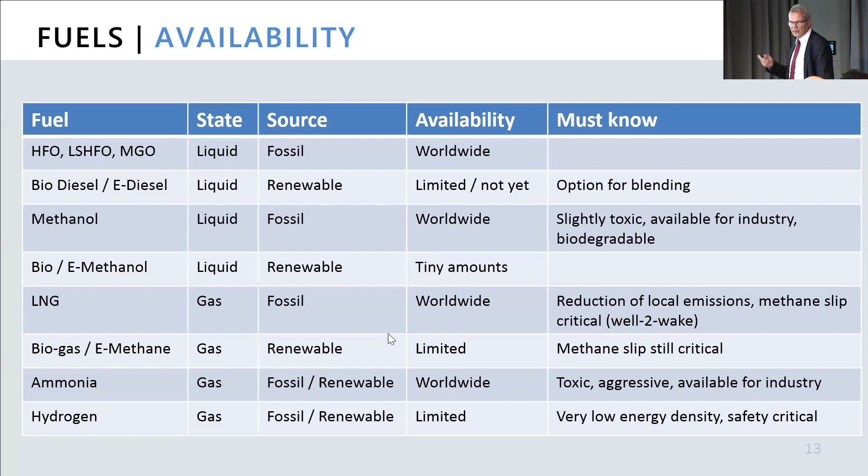One item - some of the fuels have the option for blending. So you have the possibility to phase in an improvement of the CO2 footprint based on the blending of the fuels, that you can put biofuel or synthetic fuel in addition to the fossil fuel to reduce the figures. This is only the same picture.

And one comment - everybody in the industry is now looking for hydrogen, not only the maritime industry. If you look at steel production, cement production, we need a lot of green hydrogen to really fulfill all these demands.

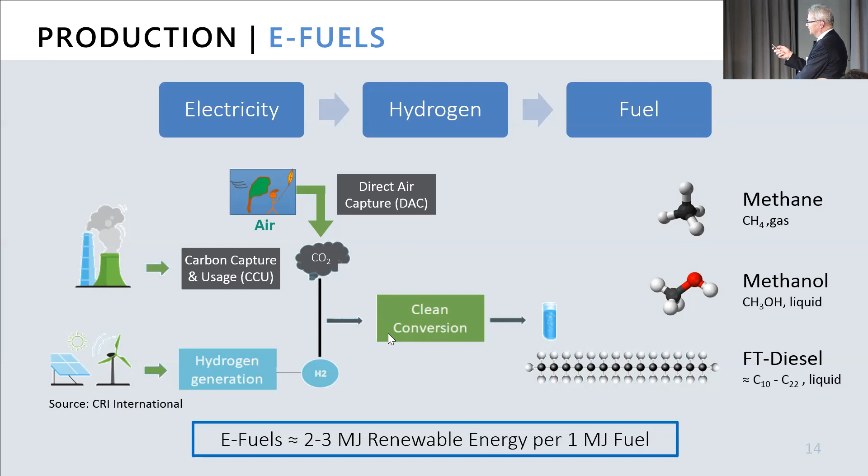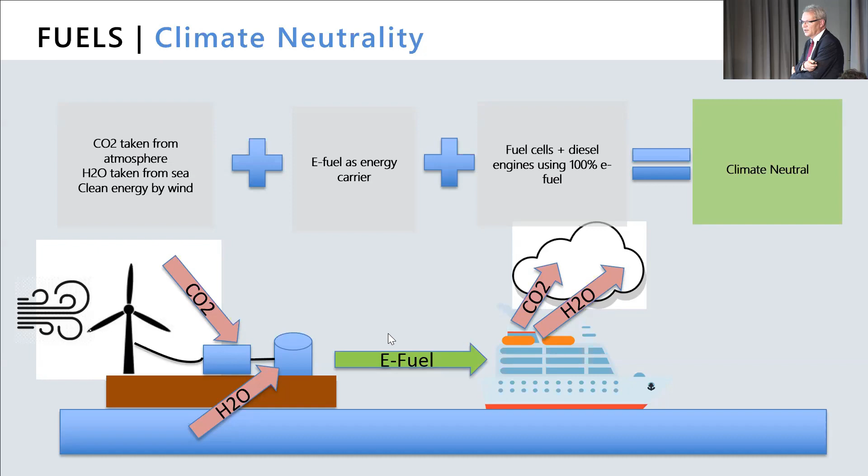A lot of this discussion, also in regard to these taxonomy rules, tailpipe, is really based on carbon-free and carbon neutral, and it's really important to keep it open also for carbon neutral fuels.

Coming to the rules for these alternative fuels, we have rules now for methane and LNG - I'll come back to this. For all the other fuels, there is something going on, but we still have something on the waiting list. A lot of the fuels we are discussing today have no rule requirements available from the IMO.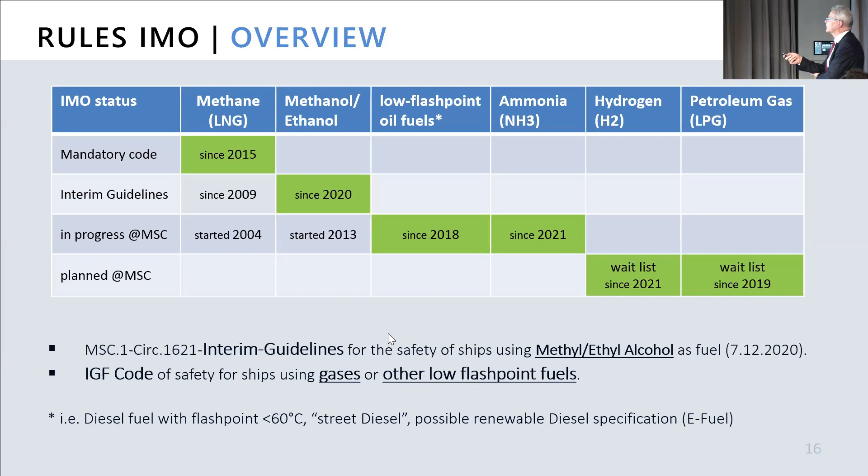But looking at this time frame, from 2007 to 2017, to develop rules for LNG, and coming back now to the list I presented before, we still have a lot to do with all these other fuels to get rules based on our experience. This is a bit of the problem we have. Our owners are asking - and Laurent mentioned it - our ships will sail for 35 years, so they ask: which kind of fuel should I put on board? What regulation do I have for this? And what is the possibility - can I still change something inside the system during the lifetime of the vessel?

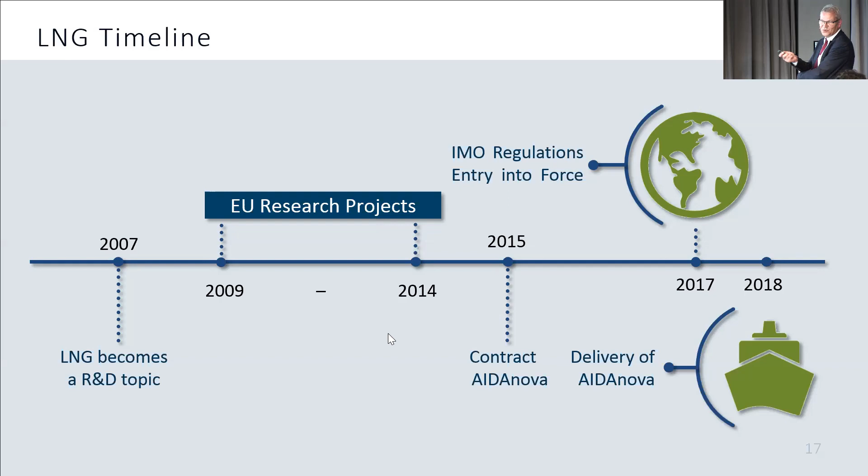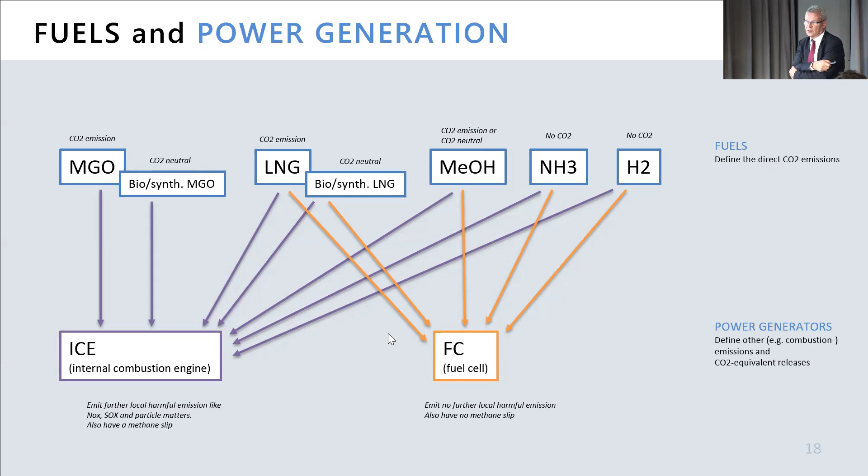For ammonia they are in the process of establishing their engines, and as already mentioned, we are using 4-stroke engines, not 2-stroke engines. Most development, if published, is normally for the majority case, not these 4-stroke engines - so if MAN is talking about engines, they normally mean 2-stroke, not 4-stroke engines. This shows a bit how the development is going, and we have to carefully look in both directions.

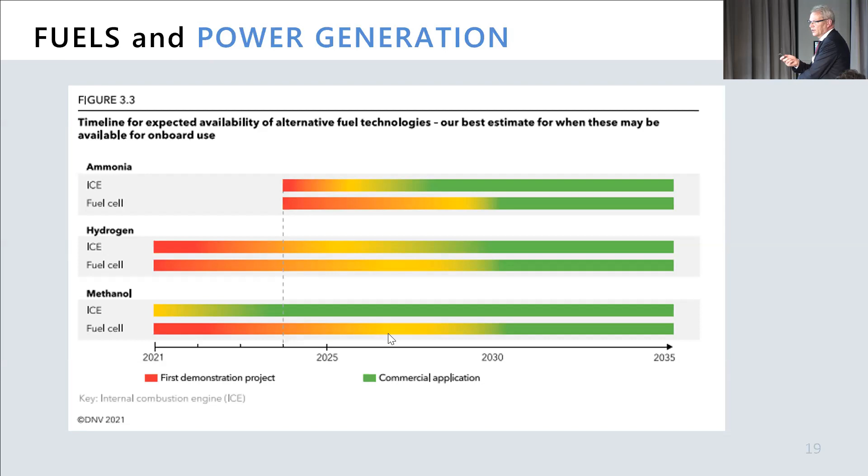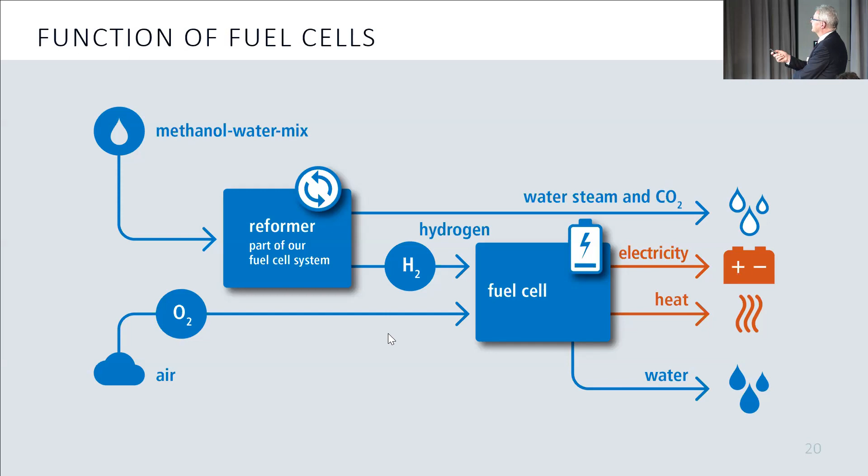So at Meyer we started this fuel cell development also 15 years ago, and we started with a demonstrator on land - a German project funded by the German government, called the Pa-X-ell project. So we made a demonstrator at our shipyard which works on methanol, with reformation and the fuel cell in one system. Then we did a demonstrator on a ferry which runs between Finland and Sweden.

And the next step was really to come to bigger units. This is also a land installation done by Lurgi in Germany, still continuing the Pa-X-ell project. In this project we will now install - I will come back to this later in the slides - 2 times 100 kW on the AIDAnova, which will be done soon. There were still some delays based on COVID, but now they will start the installation.

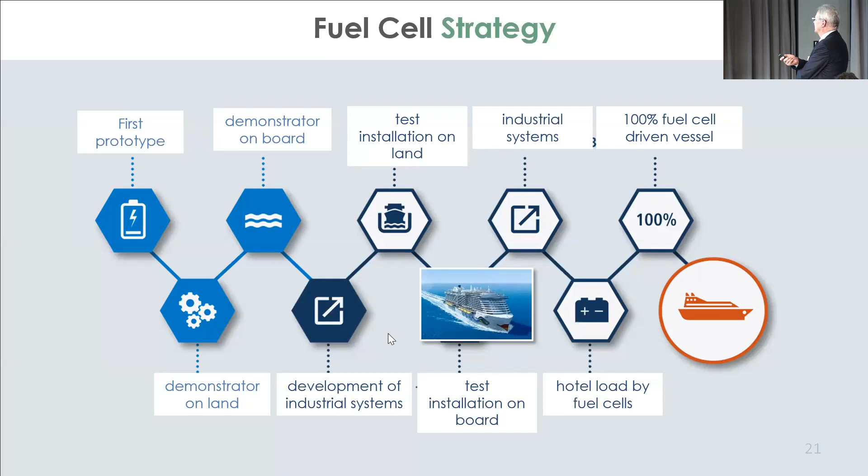Coming back, this shows a bit of what we have done on the AIDAnova. This shows that integrating a fuel cell inside a complete complex system like a cruise ship is not really a trivial thing - it's quite complicated. You have to look at all the different safety systems, integrate it into your existing power system, integrate it into your electrical system - more or less all the systems have to be connected. So this is a nice exercise we started, and I think it's quite important. This integration part is really something we have to think deeper about, and this is crucial later on for the installation of bigger systems.

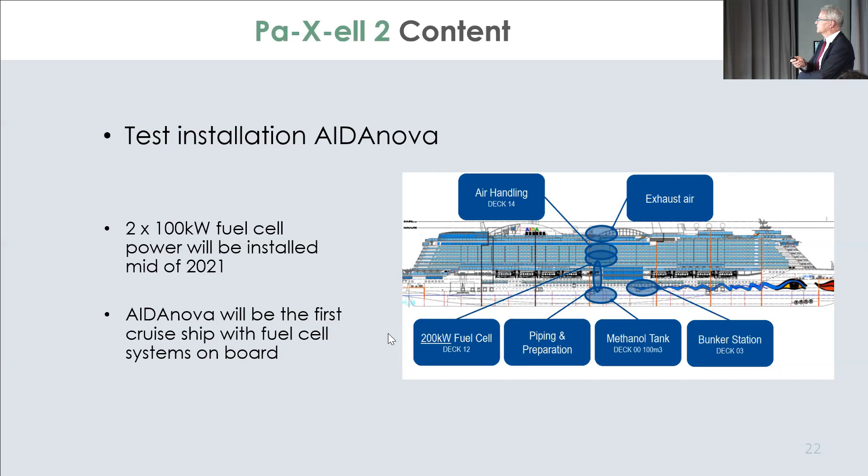One experience already is that you have to install a battery to smoothen the load of the system. The size of the battery system is still something we will learn from this, but at least you have to do something in this regard. So there must be a combination later on, also for bigger installations, between batteries and fuel cells.

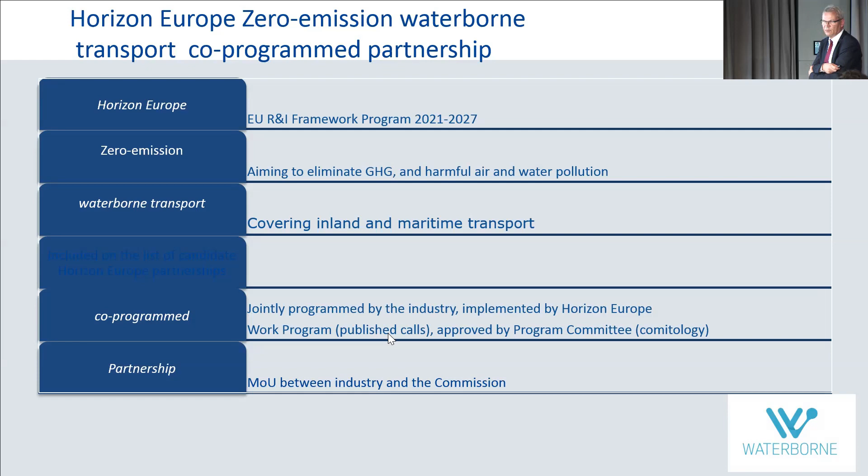Okay, and as Laurent also mentioned, yes, Waterborne has driven a lot of these things. We are quite happy that we have this partnership with the European Union to really look into this carbon-free future. This is really important for us that we are following this path.

So a short conclusion from my side. The development of really commercially usable fuel cell systems for maritime application is in progress, but there is still a lot to do. We are starting with very small units and we have to scale up. Before we come to a 100% fuel cell ship - or maybe a 100% fuel cell ship is not really possible, nobody knows at the moment - we really need to look at the power distribution and power demand of the vessel: is it really possible to use 100% fuel cells of one type, or should it be mixed with different types for flexibility reasons?

We still have to look at all the different fuel options - we already discussed this in between. So for me, there is no silver bullet, and I think that's a quite big risk. This comes to my next point: we really need to enforce rule development, but we should not do it in a way that favors one fuel or one technical option. Otherwise we are really limiting ourselves, and at this stage, with the knowledge we have today, that would be really dangerous.